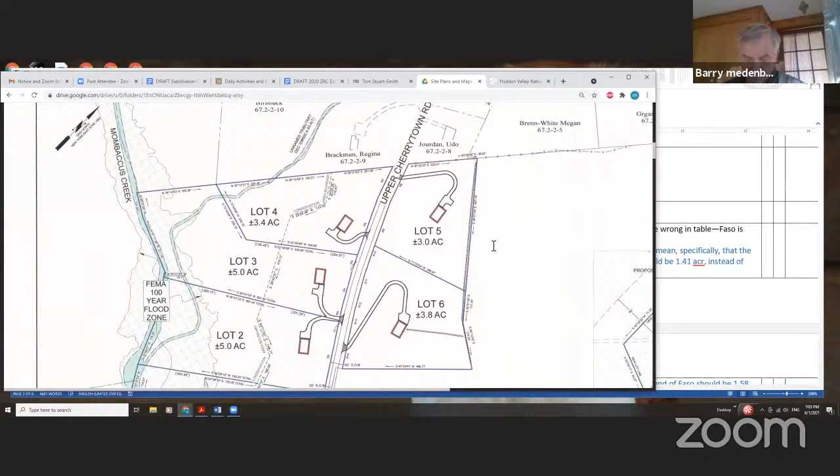So if you go to - is this it? This might be too small also for everybody to see, but you can see the lot line adjustment, lands of FASO, starts at 1.58 and then goes down to 1.41. You just need to switch the numbers.

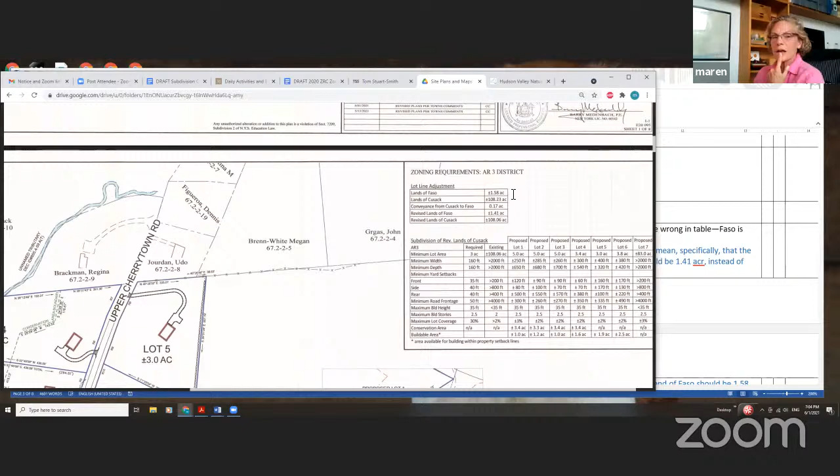Is that what you were talking about on that element, Liz? I kind of did a bunch of comments that were a little instructive. It was more for whoever's revising the plan to take another look at stuff.

That you spoke of, we do have the entirety of the tax parcel on now. We agreed that the existing features - we wouldn't make them go in and survey somebody else's land and show the house and such, so that's okay.

And some of the comments have to do with making sure that we have the property owner's information, like, I guess, lot line division, kind of a co-applicant sort of aspect. And we have on the lot line application they sent in, we have both people's information on that. So we're good on this basically, except for the goof on the numbers.

I have a comment about the table. Yeah. One more comment when it's showing - just one second.

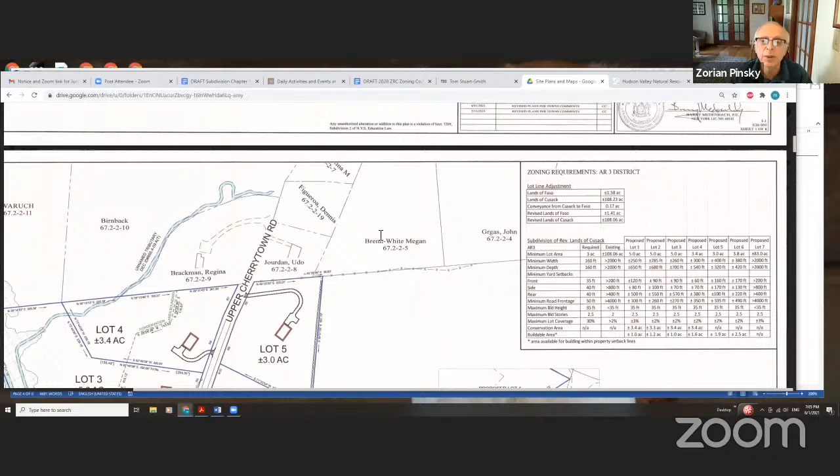Maximum lot coverage, it's showing more than 2%. Should it be 2%? No, it should have been less than. I apologize, that's my mistake.

It's definitely less than 30. It might have been between 2 and 3, right? Yeah. It's also sort of like a typo.

So on that one, Liz had that in a couple spots. There's a bunch of stuff that I think, before whether we are coordinated or uncoordinated, because even if we're uncoordinated, it's going to go to people for comment.

There's a bunch of final draft review going over and making sure all the numbers true up. Liz had a lot of things she caught where you have different sheets that have different lot sizes. So we got to make sure the whole big lot as it is now, everything adds up to the same number and everything's transferred in the same way, because some stuff is off.

I just want to point out, a lot of that is rounding errors because we didn't do the remaining lands. So plus or minus a hundredth of an acre is kind of irrelevant in the grand scheme. So I apologize if - that's okay.

That's okay. Some of it, we've done so many changes - just to double check, like lot 5, what is it, 5 and 6 - the size changed a little bit because you moved the lot line to the stone wall, and then just double check that everything reflects the new last iteration. It's like, before you send in your final, give it one more look over.

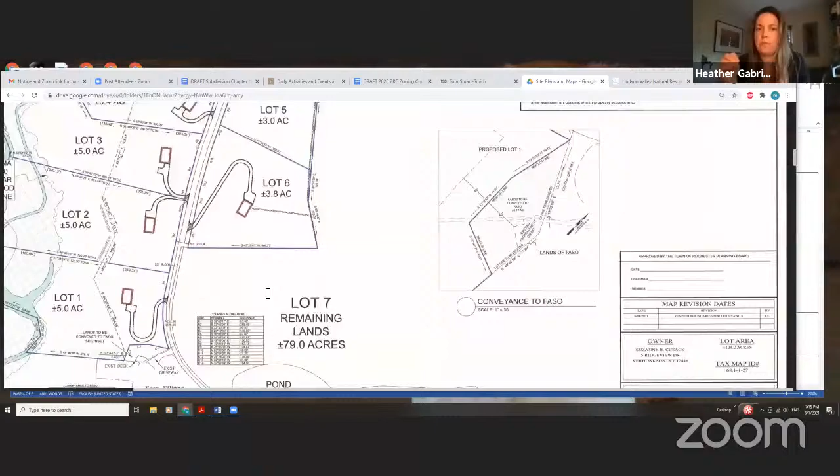Zorian, the total area of the disturbance is depicted in one of the charts, which unfortunately I don't know what page it's on, but it shows the area of disturbance per lot. It doesn't show the dimensions of the disturbance because, as you can see, there's a lot of bends and turns, but it does show the total area per lot that is supposed to be disturbed.

And no, I'm talking about when disturbance is shown on each of the lots. There is a marking like a disturbance, but there are no dimensions there. So I'm kind of wondering, you know.

Well, if you look at, so there's one of the graphics, and if we're looking at the lot that is right there, you see the limited disturbance going around everything. So yes, it would be preferable to calculate, or what you would like to see, Zorian, is the calculation to that blob.

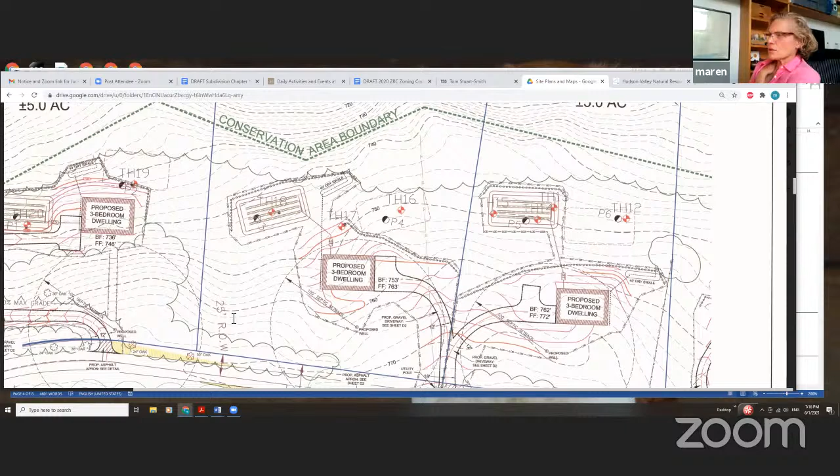No, I just would like to see some dimension relative to the house, the disturbance. Well, do you see those? I don't know, Brian, the map is drawn to scale. So if you use the scale of the map. Yeah, I understand the map is drawn to scale, but I guarantee you whoever is going to use it is not going to measure the scale.

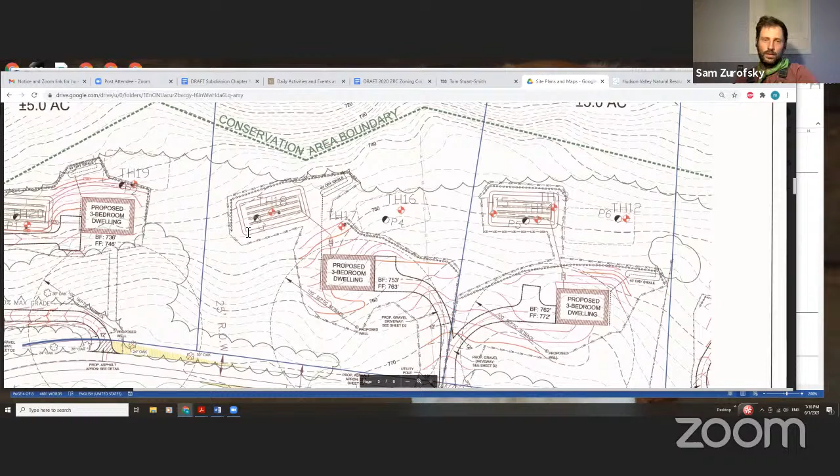Yeah, but I mean, I guess my response to that is, so what? The information is there. If someone, including you, is curious enough to know what those dimensions are, it's readily obtainable by using basic mathematical tools, which I know you possess. So I guess I don't see the point of cluttering a diagram with lines showing the dimensions.

No, what he's saying, Sam, is different. He's saying it matters more if you go... it's not for me. Right. Who's it for then? For wooded lots. So now I go there and I buy lot number 5, and I don't know any of this, I don't calculate this. And I get somebody to build the house who's just Joe whatever guy building the house, and it says right here that there's your limited disturbance lines, and they ignore absolutely all of it. And they put the house there and just cut a bunch of trees down. And now we no longer are really respecting the 3.6 acre limited disturbance, because somebody who went to build this house, who cannot read this, who does not use the scale, who does not do what you just said, disturbs.

But that gets to Barry's point, which is that's, I think, outside the purview of what we're doing here, because that's a question for the building department. That's the building department, they look at all those things—enforcement of a permit. We're approving a hypothetical situation of a subdivision, and even if we condition an approval on these home sites and these LOD lines, it's still not our responsibility to make sure that a future developer who's issued a building permit follows that. That's on code enforcement, and all of those people are fully equipped to interpret these maps, which is the point I was making.

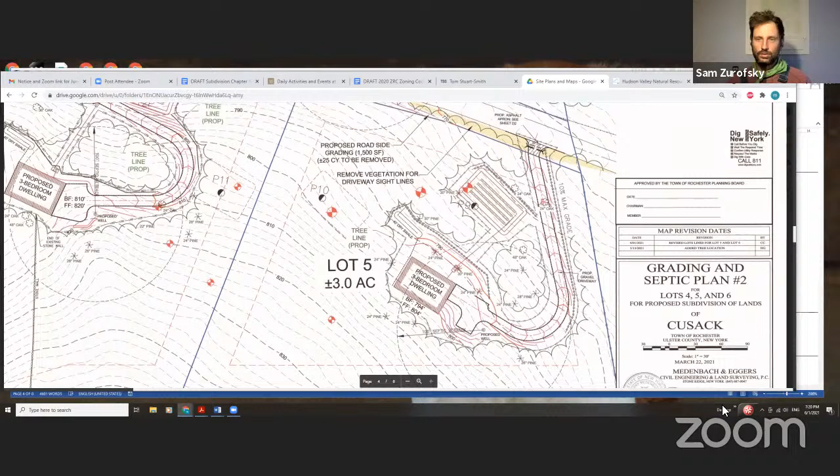It is shown. It is on the plan because it's small, but it is shown on the grading and septic plan. Right. It is shown as the limits of disturbance for each lot. So it sounds like we have complete agreement between all parties. That's great. So I know you're way better at this than I am. If you go up to the right on plan 2, I think there's a table there that shows it.

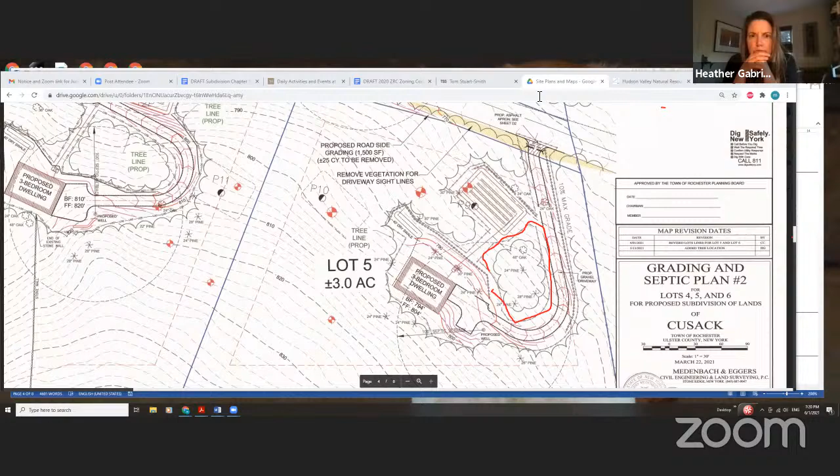Exactly. So vaguely, look, you can see here's our limited disturbance. Up in the top right-hand corner, I think there's a table there. I just can't seem to read it. Yeah, it is there, one on each one of those pages. Oh, I gotta go too far, hold on, I'm getting rid of my squiggle.

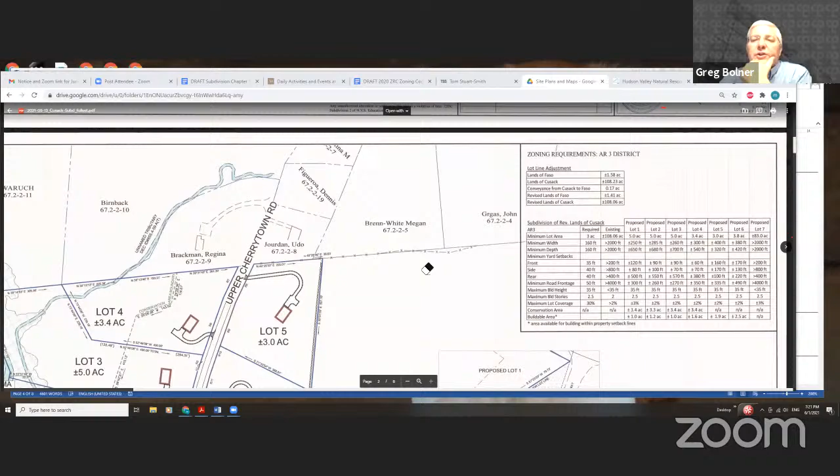So this is in here, correct? No, it's actually on the individual grading plans. It's on sheet 2. Right underneath the septic details. Should there be a stop, little stop right there? Sorry, there we go. Underneath septic details.

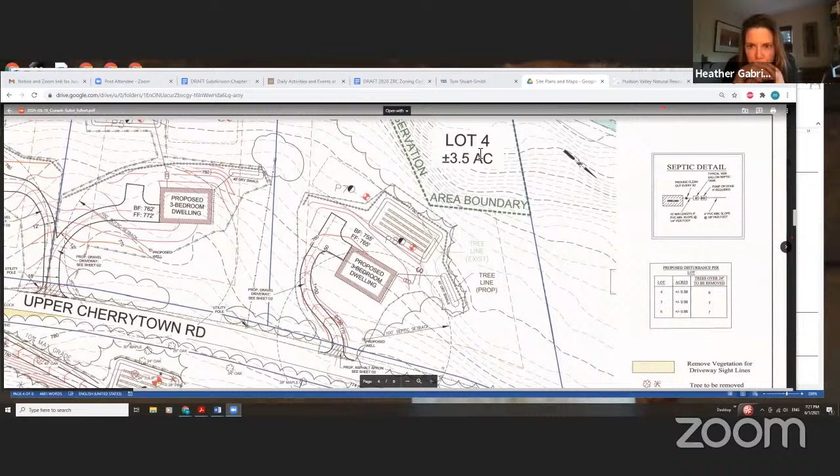There's a table there that says lot 4 proposed disturbance, areas proposed disturbance 4, 5, and 6. Proposed disturbance per lot, yes. Oh, I see, you have the trees and the disturbance all in the same table. I thought it was just... exactly, we're talking about what's going to be removed. So there's a tree table and a disturbance table. There we go, it's my fault.

So you see lot 4, you got plus or minus 0.58. Lot 5, 0.5666. So it is shown there. And so if you say, please reference the proposed lot disturbance, the applicant or the developer shall not be able to go over more than 30% as a condition of approval to get a building permit, yada yada. You put it in as a condition. Are we good there?

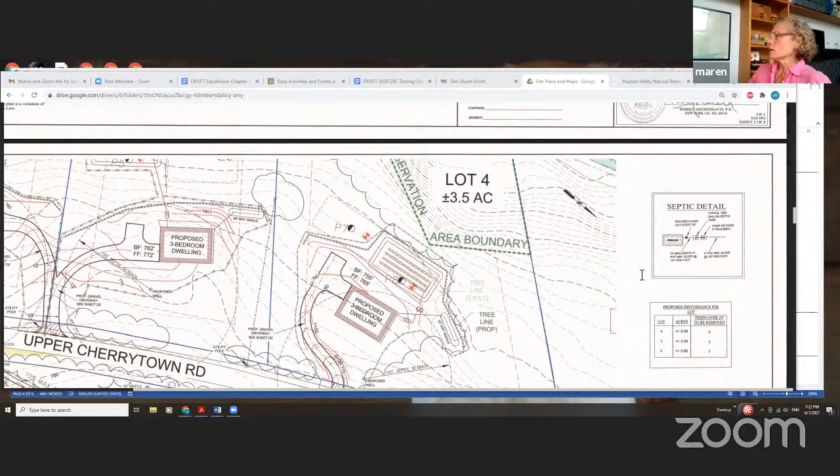Addressed. On the trees, if I was correct on this one, we punted to larger trees because 8 inches was going to be excessive for tree analysis, and we did get that. On the map, this is again a final look before we circulate or do anything. On the very front map of the last one, we lost the map on the lots, but then we lost the streams. Then they came back again afterward.

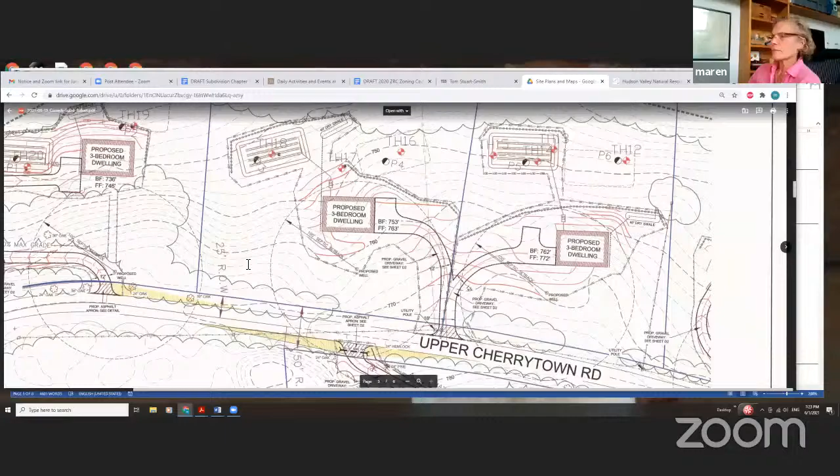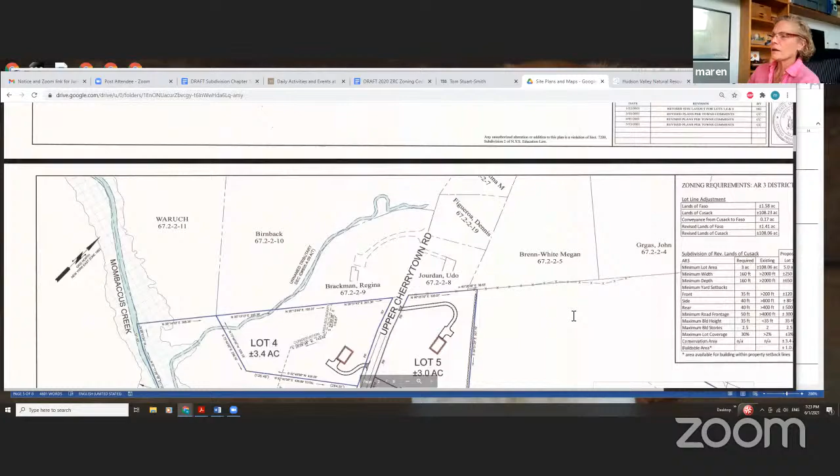I'm sorry, what? So look at that, you see the little feeder stream? It's just the overlay hit. Oh, I see, it's trapped under the hatching for the conservation area. Yeah, everybody, we need to untrap it because once it gets trapped, it's fine here.

We should have the 100-foot setback line, even though it's all safely within the conservation area. Just call it out on the map. To the tributary as well, that's an unnamed stream, but you want the 100-foot buffer on it. No, on the Mombaccus I think is just all we need. Okay. I mean, even if you did the tributary, everything's well away from it.

So this is the conservation area boundary, et cetera, and this is a question for everybody on the board also. We do have narrative about what is intended for the conservation area boundary as far as restrictions on clearing and development. We do have the letter regarding deed restrictions. Does everybody want to look at that now, or do you want to look at it in preparation and see if you have any additions or comments for next board meeting? We've had this for a bit.

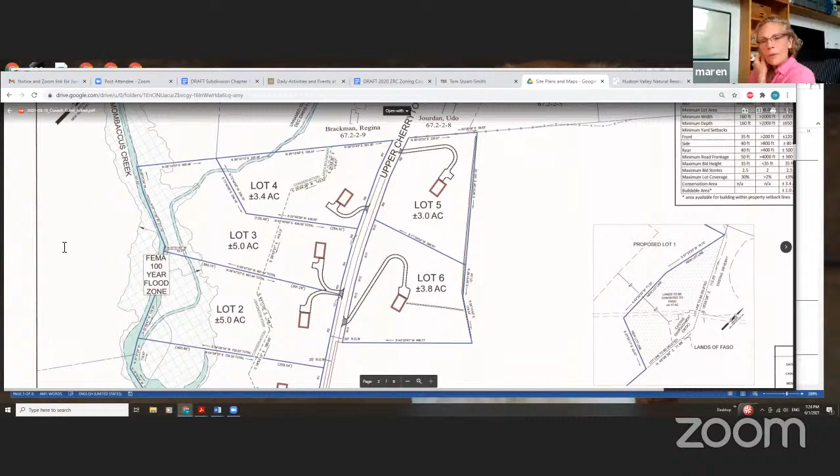Are you talking about that letter from Mr. Collins? Bill Collier's letter. I would recommend that everybody look at that, but don't finalize it until after we've started the public hearing process, because we don't know what the neighbors are going to have to say. So everybody should re-review it and see if they can find a hole in it, but wait until we finish the public hearing. That will give us at least a good basis here for that.

Then, how does everybody feel about adding in the forest or habitat, which we're habitually asking everybody else about? Some of this is on lands that aren't even being touched, but as long as on the big map we show the DEC habitat map or forest matrix, et cetera, that you've done before, Heather, so we have it on there.

You have seen my comment on the other applications regarding GIS letters and the disclaimer on the DEC mapper website saying that it is a GIS layer and needs to be validated by a biologist, which we've done. So I'll put a pin in that for discussion off board if you want.

Maren, I have to admit I'm not sure where you are in the comments at this point. I'm looking in our new comments, trying to find number 7, is it? No, it's number 2, not number 3 in your comments.

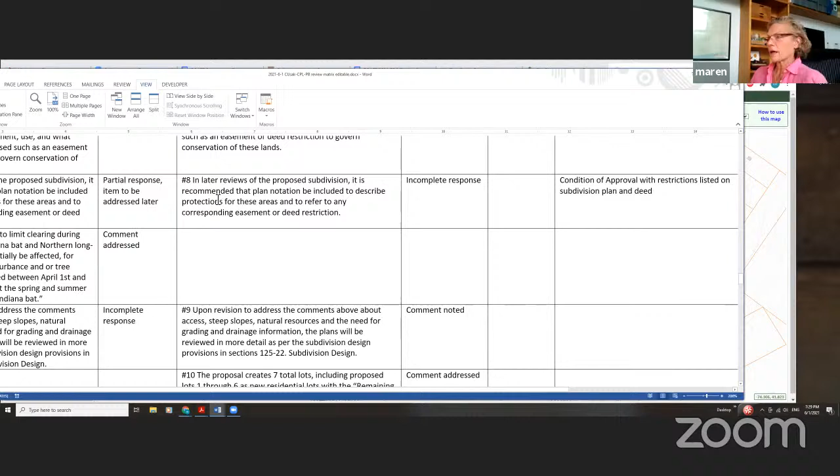As I said, look through Barry and Heather's latest comments just to make sure all the numbers true up. Right, that's just cleaning up the numbers. This is the partial response, just cleaning up. That's why I said my comment is fix all the numbers so they all true up. Right, and we agree, addressed.

This one is an offline discussion, this is the stormwater review that you guys really need to take offline. Because I don't even know what a broad crested weir is. So, yeah, this is one of the things I want to discuss with Greg about.

That should be provided when they apply for their building permit and come up with a soil erosion sediment control plan. There could be some variations then, maybe we need a bit more. Maybe we need to decide in your discussion with Greg how we word the conditions. So you have a discussion with Greg and come to a conclusion, then he can tell us how we appropriately word this, so that when they go to the building department, this is all taken into consideration, because the building department needs to be spoon-fed exactly what to look for. They're not exactly overstaffed in the Town of Rochester building department.

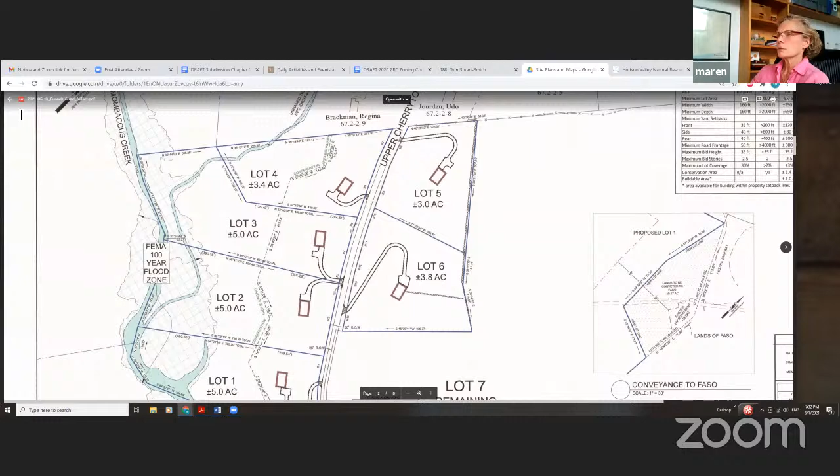And then we get to the last two, which have to do with the EAF. So we're pretty sufficiently dialed in here. I've got so many subcategories in this.

Maren, is the Dropbox available to the public to view these documents, or is it just for the planning board? No, it's just the planning board because it's too much foilable type stuff. Okay, so the answer is no.

I wonder, I know in other communities, sometimes before a hearing there's a way to post the latest project materials so the public can look at it. I don't know if there's a way to create a single PDF that somebody could just click on and open. There's definitely ways they could do that.

And when we become so overstaffed, maybe we'll be able to do some of those things. But right now, volunteer Maren is not a volunteer, unless somebody else on the planning board would like to raise their hand right now to be the person that spends their time doing that. Not suggesting that. Oh, wait a minute.

I hear everybody volunteering. Heather, this Google Drive used to be paper that was given to everybody and they'd come pick up their files. So it's the equivalent of the files we used to have, and we're being kind to the environment by not making 7,000 maps and everything.